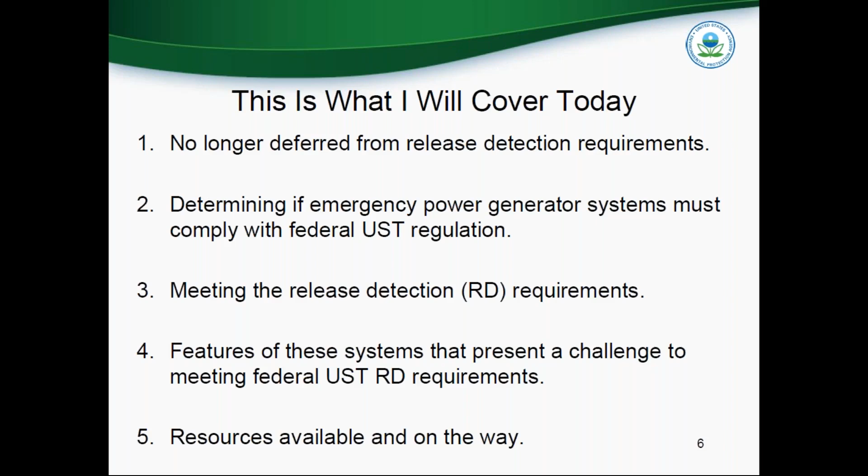But launching into my first topic here, it's the deferral. It's no longer applicable to these UST systems. The original federal UST regulations in 1988, they deferred these systems from the release detection requirement. That deferral was never intended to be permanent. The systems were not excluded or exempted. They were merely deferred to address technical issues at the time. Those technical issues, they centered around, for the most part, the remote locations of these emergency generator tank systems, sometimes associated with communication towers and things like that, even hospitals.

At the time of the proposal, there was that need for EPA to establish different requirements or tweak the requirements for release detection that were applicable to typical systems or traditional systems, more focused for the emergency power generator systems.

But lo and behold, in November of 2011, based on information that we received and getting the regulatory process underway, we discovered that about 30% or so of the emergency power generator systems were already regulated across the nation. That was due in large part to a number of states not deferring these systems.

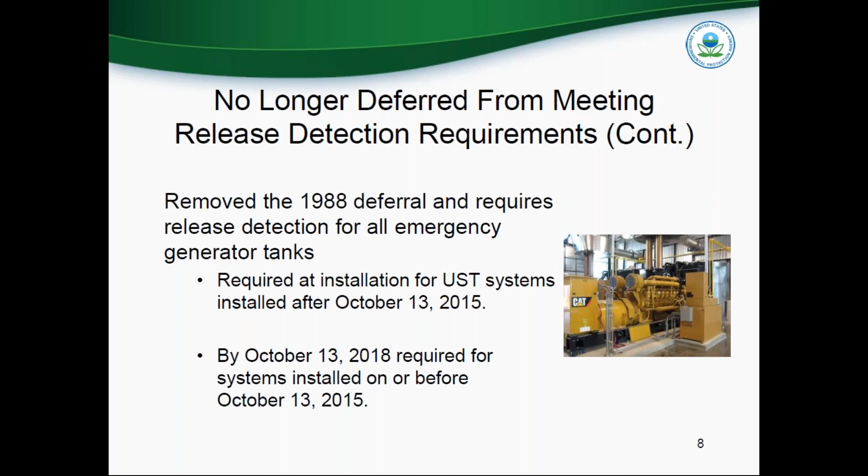So the older systems that were installed prior to that October 13, 2015 date, EPA provided a 3-year time frame for owners and operators to retool their systems to meet the release detection requirement. So as of October 13, 2018, the older systems had to meet the release detection requirement.

So let's take that 30,000-foot view of determining whether a power generator system is regulated or not. I'm going to give two main considerations, and we can dissect it from there. First consideration is, does the power generator system, and I'm not calling it an UST at this time because we don't know if it's an UST. If you do, you have to do the calculation. You have to look at the definition of an UST, and it's provided by statute and in the regulations. I'm going to read it real quick so that we're clear.

The underground storage tank, or UST, means any one or combination of tanks, including underground pipes connected thereto, that is used to contain an accumulation of regulated substances, and the volume of which, including the volume of underground pipes connected thereto, is 10% or more beneath the surface of the ground.

Now, looking at that, one very important phrase to pay attention to is that one or combination of tanks. That phrase right there, and this word in particular, tanks, the definition does not single out underground tanks, does not exclude above ground tanks. This definition includes above ground or underground, below grade or above grade. I'll try to refer to them in that context, above grade or below grade.

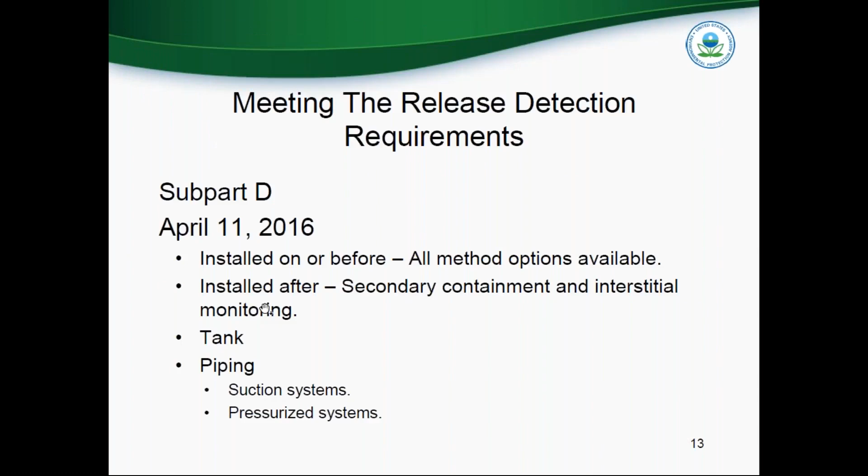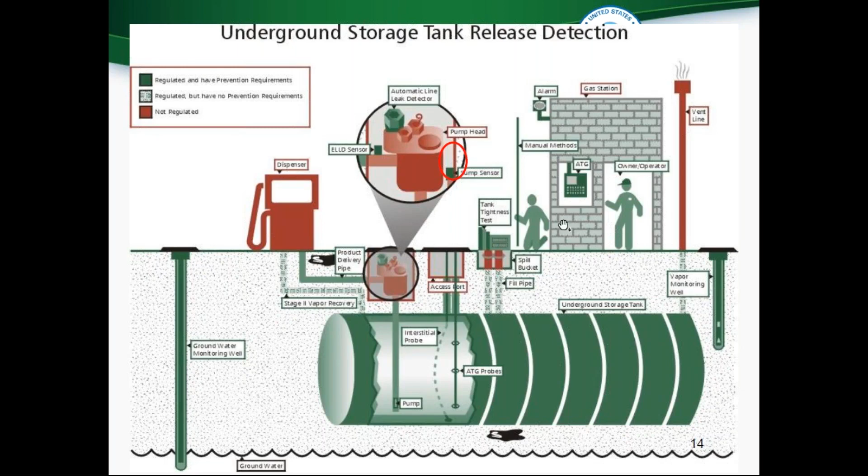So looking at the requirements here in a graphic form, this graphic has been presented in a number of EPA publications. It just shows in situ where these release detection methods are used in the system. This list that I provided here is just a shotgun approach to the tank options and piping options. The monthly requirements for tanks are applicable.

Again, interstitial monitoring after that April 11, 2016 date is the only method that can be used. Owners and operators may back up their systems or use duplicative release detection or backup systems, but primary is interstitial monitoring for the release detection requirement.

You also have the piping requirements here. For your suction piping, a number of these systems are still suction systems, but with those larger capacities, they switched over for the most part to pressurized piping systems. But if it meets the safe suction system, a European suction system, no release detection is required.

There has to be that proof, of course, of verification that it meets the European or safe suction setup, but no release detection is required. Otherwise, the 3-year line tightness test or a 30-day piping monitoring release detection method is required. We're familiar with the line leak detector requirements for pressurized piping. There's that dual requirement. They have to be met.

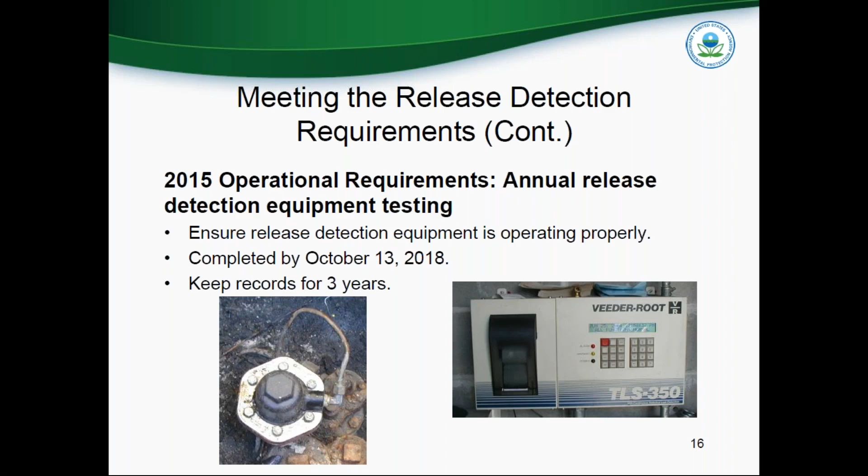So I want to move on to my fourth area that I want to cover today. I want to talk about a 30,000-foot view of the components of emergency power generator UST systems that present a challenge for meeting release detection requirements. There are 3 in total that I want to focus on. There may be more, but these, I believe, are the most problematic or urgent to address.

Not only are these components part of these systems, and not part of traditional UST systems like at C-stores, but there are some regulatory requirements and codes of practice that apply that present the UST program, or owners and operators, with some challenges to meet not only the UST requirements, but the requirements in those codes of practice. The generator itself, that's not something you see typically at a C-store. The day tank, an above ground tank, typically is not something you see at a C-store.

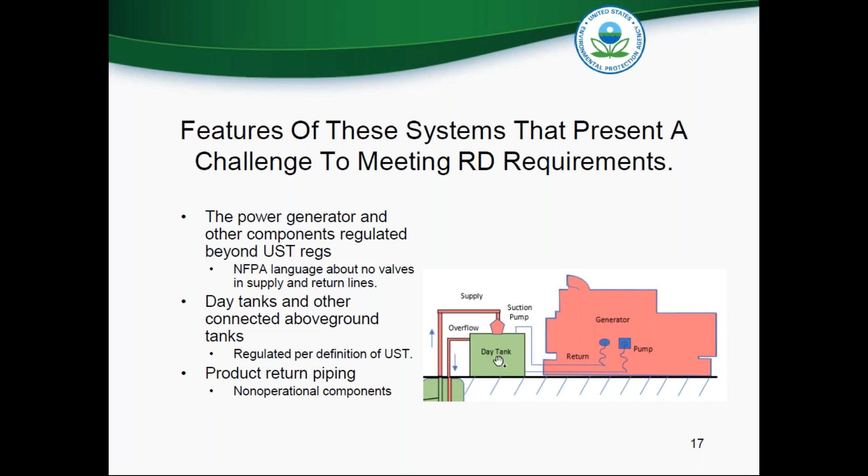day tank. In order to meet that requirement here, EPA, we were asked to look at the gravity feed lines, and the issue of gravity feed lines addressed, for all intents and purposes, the NFPA 37 restriction, if you will. I'm going to use two diagrams to talk through this. If you look at this configuration of piping here, this is the return line coming back from the day tank. It is pressure assisted. This product comes to this point, and for all intents and purposes, it flows back by gravity from this point back to the main tank.

As long as there's no obstruction to prevent that flow back into the main tank, EPA views this line right here, this section that's regulated. Again, the above ground lines are not regulated. This below grade line is regulated. So from this point basically back, that's in the federal program. That's our requirement or our jurisdiction. There's no blockage back to that. EPA views this as a non-operational component. This is again akin to a fill line. It's basically a refill line from the day tank back to the main tank, if you will.

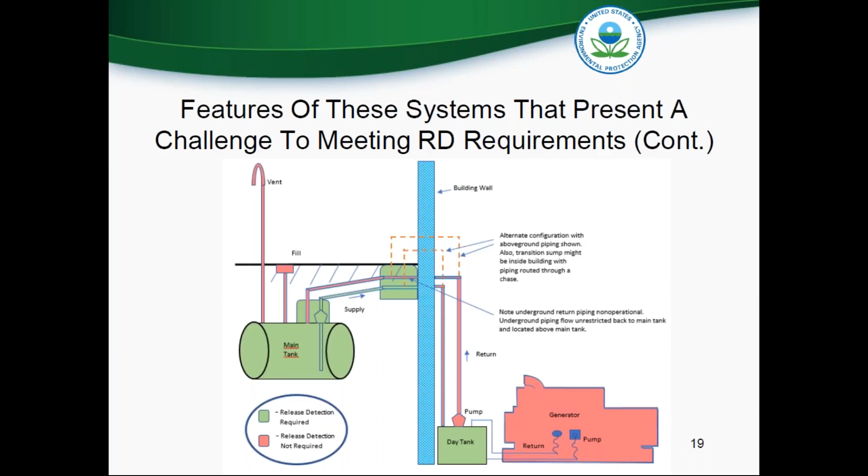Hey, can you give me control back, Nick? I want to bring up that diagram I had real quick. Sorry about that. Or maybe I still have control? Maybe I can go to it quickly. Yes, go back, keep going. Sorry about this, guys. Further. Keep going. Further, please. There you go. Stop. Okay, go back.

All right. Looking at the diagram on screen, this above ground piping, whether it's 10 feet or 10,000 feet, none of this piping is regulated under the federal UST requirements. The volume in this piping is not included in that 10% determination. Very good question. There are some situations where this piping runs up to the 10th floor, for example. It is behind concrete. That's still not underground.

That piping run, whether it's 10,000 feet up to the 100th floor, going to the day tank on the roof with the generator, does not factor into the consideration of whether this is a UST system or not. And that piping does not have to meet the requirements of federal UST 40 CFR. 40 CFR does not apply.

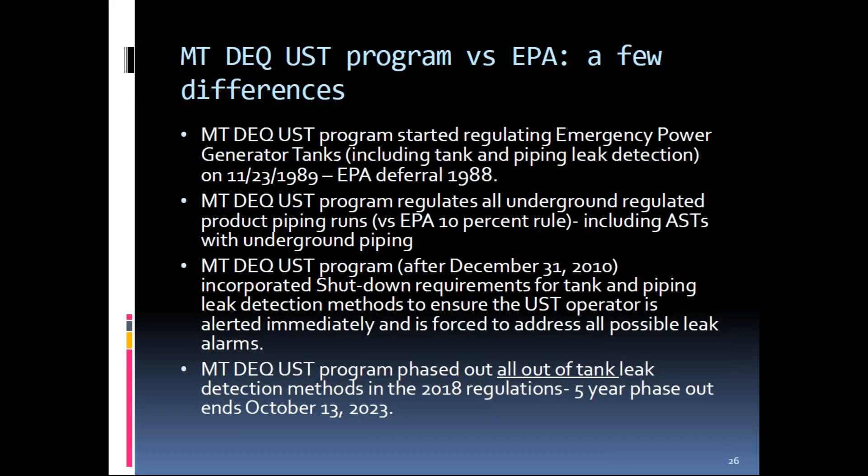And also, as far as the tank, if you have a double wall tank with an annular interstitial liquid sensor, discriminating or non-discriminating, you would have to program the ELD to shut down the dispensing system. And Montana also decided recently to phase out all out-of-tank leak detection methods. We added this with the federal 2015 regulations, which ours are 2018. And we did a 5-year phase out ending October 2023. So groundwater and vapor monitoring will no longer be a valid method of tank and piping leak detection.

Some more differences. In Montana, we also issue UST construction permits. So anytime one of our licensed individuals wants to modify a system, install a system, or remove a system, a permit is required, so we can put all the requirements that we have on the permit. Even though we regulate above ground tanks with associated underground piping, we don't currently have an SPCC program like the federal program. So that's something that we currently don't implement and regulate.

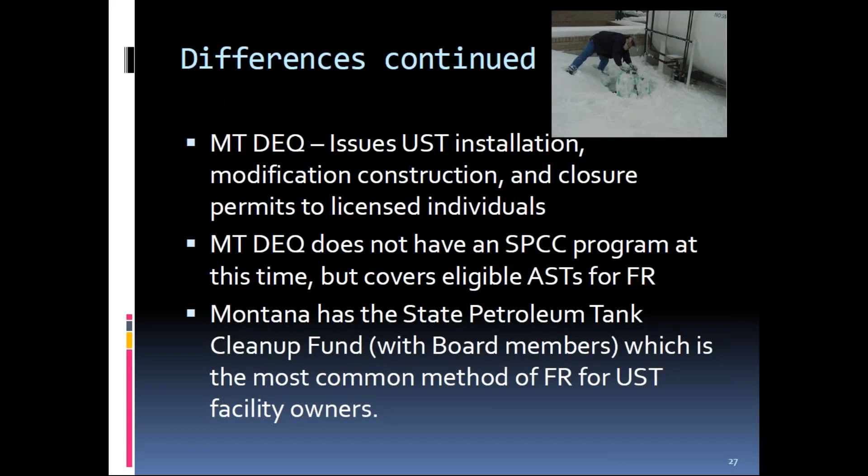But ASTs are eligible for the state financial responsibility fund. Montana has a state petroleum tank release cleanup fund with board members, which is the most common method of financial responsibility for UST facility owners. Another thing we added to the regulations in 2011 is an anti-siphon requirement, specifically to address some of these unique systems with above ground tanks, underground piping, EPGs. I believe this came from the fire code, and we decided to add it into our regulations as well.

The owner or operator of a system that is located at an elevation that produces a gravity head on an underground piping system shall ensure that the product pipe is equipped with one of the following devices: a department approved anti-siphon valve, a department approved normally closed solenoid valve, or another department approved device designed to prevent siphoning. So this is from PEI, and it shows a mechanical anti-siphon device on the left with a suction pump or suction dispenser.

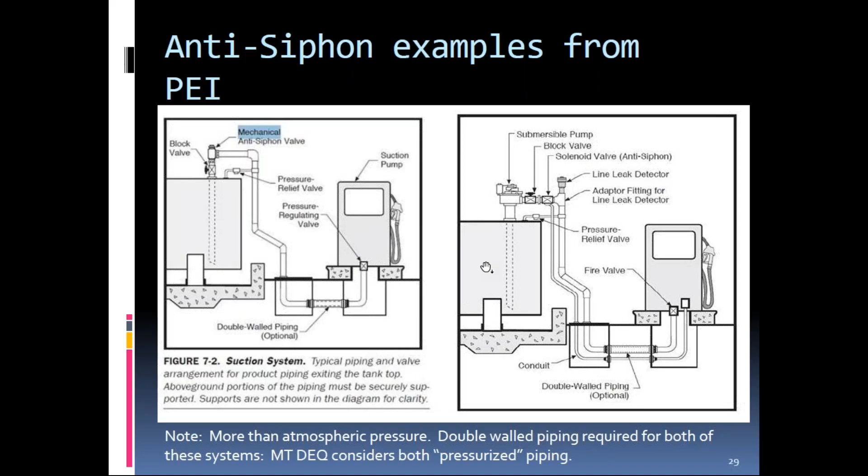So that's the general order on the right with an STP showing the solenoid valve before your ALLD, and that could be a mechanical line leak detector or electronic line leak detector installed there. It shows like an adapter fitting or what we call like a T housing. We'll get into more detail of that later, but basically I just wanted to show you some unique piping situations that we addressed, and these kind of situations would apply also to emergency power generator systems.

So we were a little late to the party on the farm tank exemption. The EPA and the federal regulations were effective, I believe, in 1988, where Montana, we did our exemption in May of 1995. So we exempt underground farm and residential non-commercial motor fuel and heating oil storage tanks of 1,100 gallons or less, which were installed before April 27th, 1995.

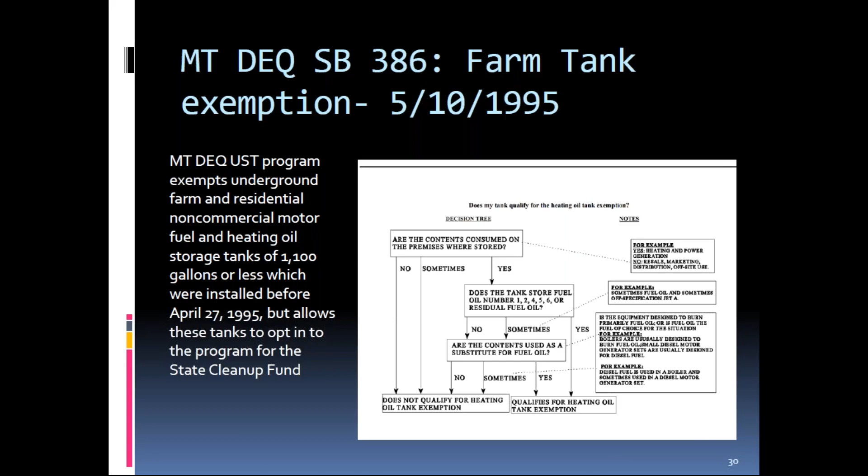But we also gave the owner-operator the option to opt in the program, and then they would be eligible for the State Petroleum Release Cleanup Fund as far as the state financial responsibility mechanism. I included a schematic of what we've used in the past for a decision tree to determine if they're eligible for this exemption. Obviously, the main question: are the contents consumed on the premises where stored? And Tim also noted that.

So for an inspector in a state, all of a sudden you have to meet the new requirements with emergency power generator systems and owners and operators as well. So we're going through this period of change, and change is tough for most folks out there, and it seems like specifically even harder for owners and operators. Once they get into a plan and a system, it's hard to change.

And that kind of relates to The Last Dance, watching on Netflix there with Michael Jordan, Scottie Pippen, Dennis Rodman, all kinds of different personalities. And at some point, Michael Jordan was scoring a lot of points, but not necessarily winning all the championships. So when Phil Jackson came in, he changed things up, and he wanted to take the ball out of Michael Jordan's hands a little bit and move the ball around more. And that way, they called it the triangle, have a lot more options for folks to play off the ball and things like that.

And it's kind of like what we're going through with emergency power generator systems. A lot of personalities out there in the owner-operator world, and so we have to kind of be team players, work together in these times of crisis. And the nice thing about times of crisis is that lots of innovation occurs, and so we'll get through it.

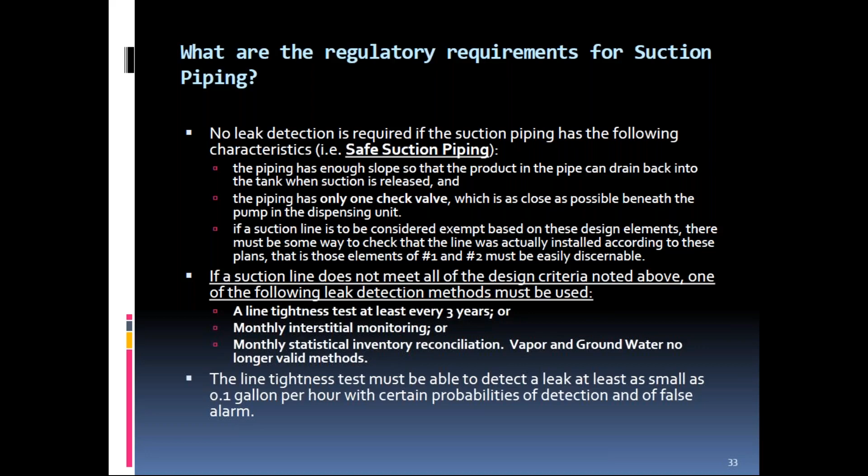In Montana, we no longer allow vapor or groundwater. We're phasing those out. And of course, each pressurized piping run must have one leak detection method from the set. So if all of a sudden you're into a pressurized or more than atmospheric pressure, then you need an automatic line leak detector, and that can be a flow restrictor like an MLD, an automatic flow shutoff like an ELLD,

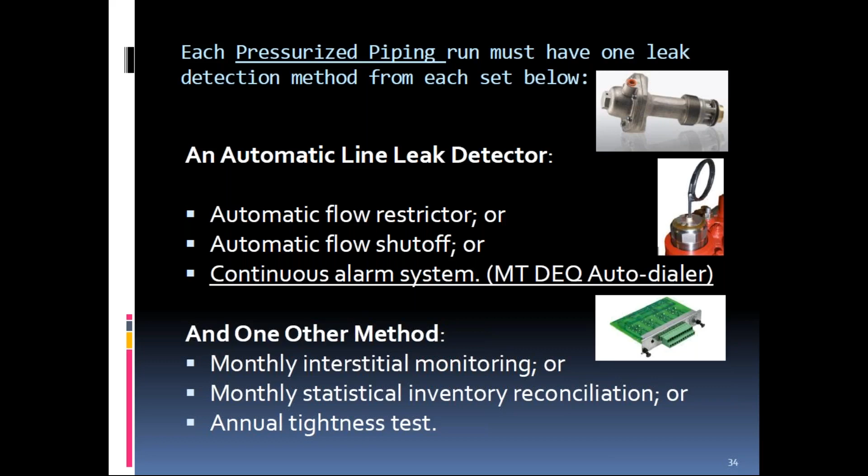and you could also refer to like a liquid sensor with required programming to shut down as possibly that as well. And then a continuous alarm system, which we call in Montana like a Montana auto dialer as it applies to emergency power generator systems. And then you need a monthly piping leak detection method, of course.

So for pressurized piping, I wanted to point out that the ALLD must be designed to detect a leak at least as small as 3 gallons per hour at a line pressure of 10 pounds per square inch within 1 hour by shutting off the product flow, restricting the product flow, or triggering an audible or visual alarm.

And that's kind of what we call an auto dialer, because we decided instead of requiring the emergency power generator systems to shut down, that we would require them to be notified immediately and address those issues. Other facilities that wouldn't be like a heating oil or EPG system do have to have the shutdown. That's kind of how we do that.

And so how that works with an auto dialer is a continuous alarm system which constantly monitors line conditions and immediately triggers an audible or visual alarm if a leak is suspected, like your liquid sensor goes into alarm and detects product in the containment sump. Automated interstitial line monitoring system can be set to operate continuously and sound an alarm, flash a signal at the console, and even ring a telephone in a manager's office when a leak is suspected.

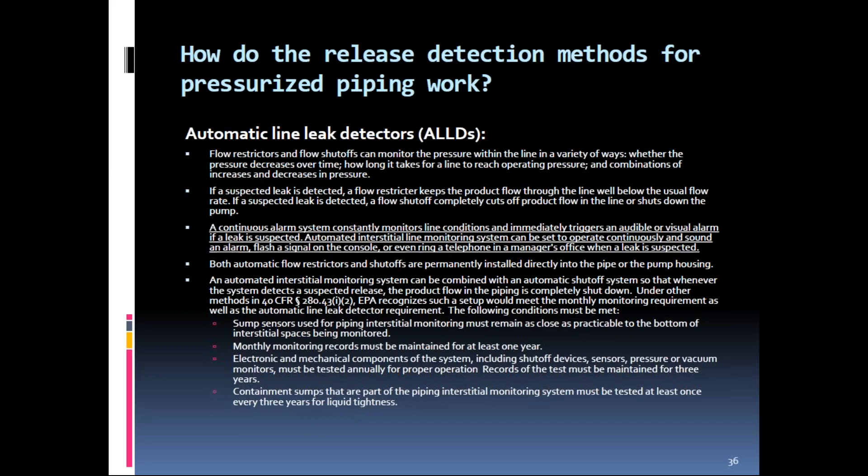Typically, we do the telephone, like an auto dialer, some brand names possibly like a Sensaphone, but they work with an existing leak detection panel like a Veeder-Root or Franklin Fueling System tank monitor as well. We do see some places like detention centers that prefer, instead of a telephone, they have a green or red light that flashes at a 24-hour manned station where there's always an individual there watching that system.

So full disclosure on these 5 versions of US suction systems we're looking at, these did come from South Carolina. So thank you to South Carolina for sharing these. They were really well done. And we can kind of show the differences in the 2 states. Montana has some slight differences, and we can go over that.

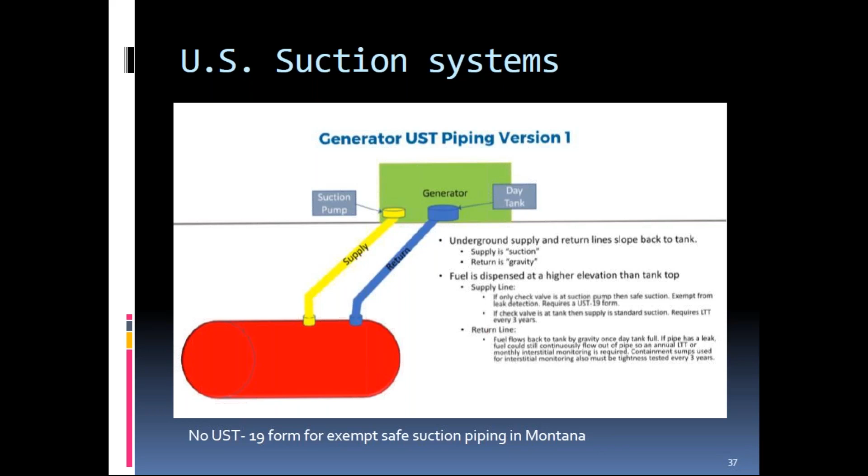In Montana, the only difference is on the return line, we require at least a line tightness test on a 0.1 gallon per hour basis once every 3 years, so not annually. And I believe that this would be a non-operational component on the return line for EPA, and that there would be no leak detection required. So Montana, we kind of fall in between EPA and South Carolina.

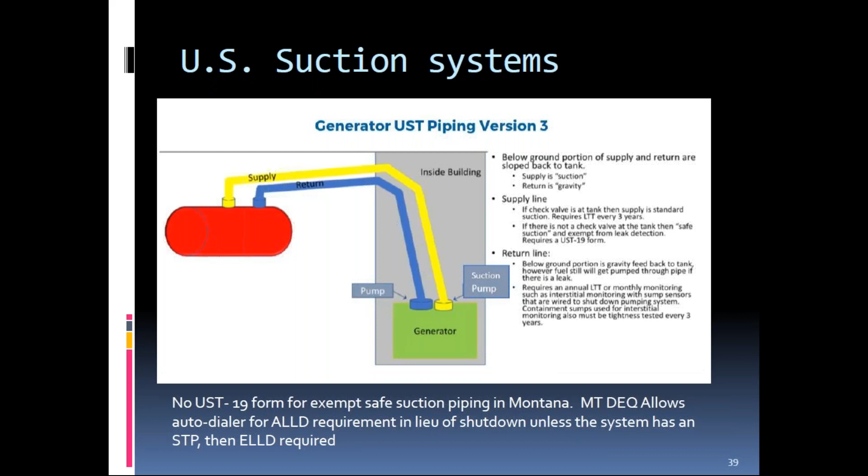Hey Seth, this is Drew. Sorry to interrupt real quick. I want to make sure we have plenty of time for John. So if you can bring it home in the next 2 or 3 minutes, that'd be great. Thanks. Go ahead. Okay, sounds good.

Version 4, we got a supply line with looks like a submersible turbine pump, and then return day tank with or without a pump and returning to the tank. Supply is pressurized, return is gravity. And so supply line piping is pressurized, requires the ALLD and an annual line tightness test or monthly interstitial monitoring.

And then the return line, fuel flows back to the tank by gravity once the day tank is full. If pipe has a leak, fuel could still continuously flow out of the pipe. So South Carolina requires an annual line tightness test or monthly interstitial monitoring method. Without the pump, on the return, we would require that 0.1 every 3 years. With the pump, we would require at least a 0.1 annual line tightness test or continuous interstitial monitoring method with an auto dialer.

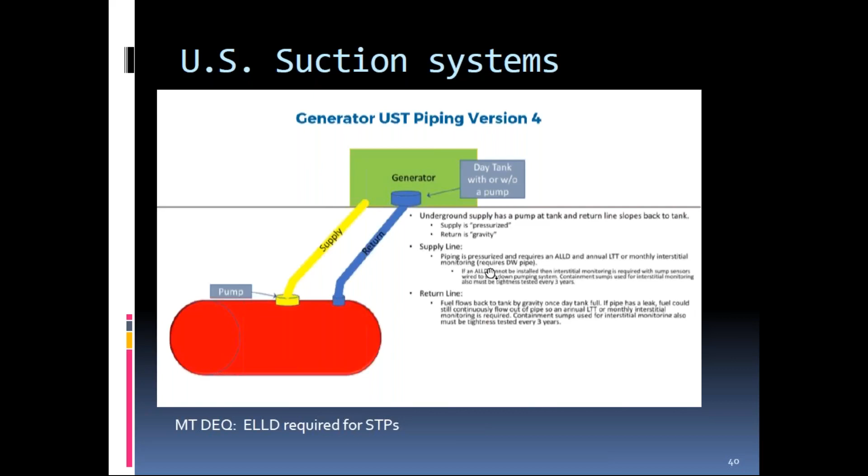So basically, the auto dialer plays a big function in Montana with emergency power generators, and we allow the auto dialers to be installed to existing or newly installed leak detection panels, automatic tank gauge for these kind of systems that are US suction systems that may have pressurized components, but do not have STPs. Auto dialer communication will send all alarms to the concierge station for 24-hour notification response.

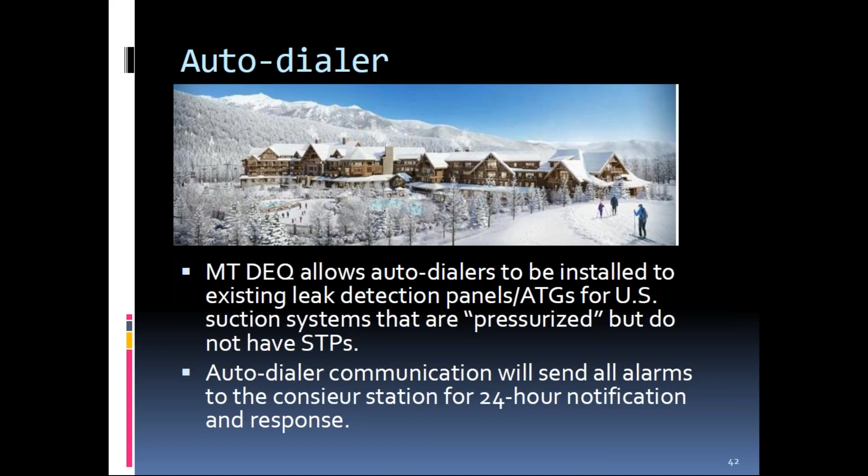This is a newly built Spanish Peaks Lodge that has an emergency power generator system with the concierge manning 24 hours. Just wanted to point out for STPs, we require those ELLDs to be installed, and we can get into more details on that, for pressurized STP systems that are part of emergency power generators.

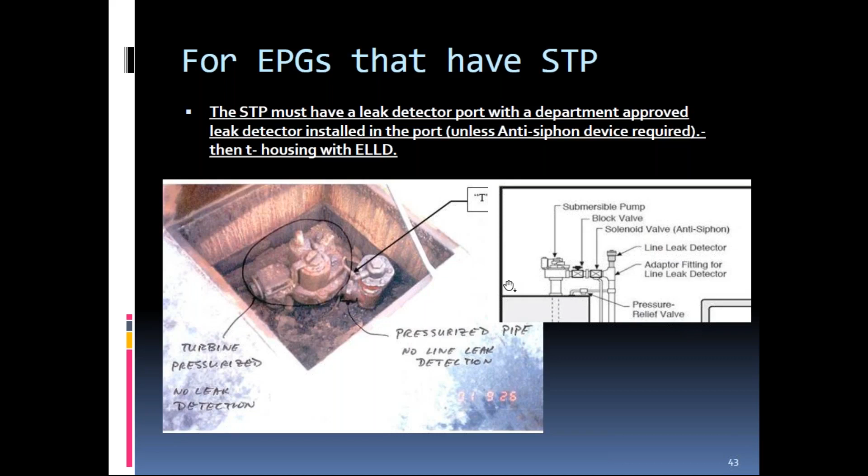So that's basically everything I have for you today. Hopefully it's been a help for other states, territories that are looking at doing tank and piping leak detection requirements and implementing the federal regulations in their state.

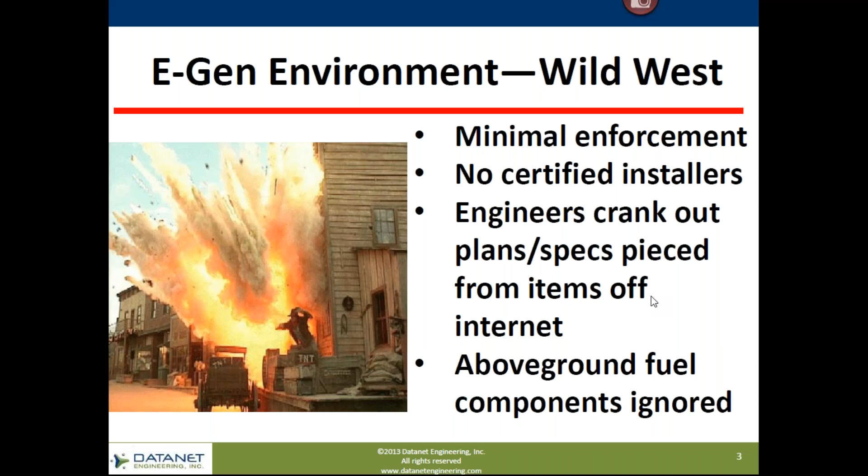It's the little EGen tank and the fuel piping. That's where we're at the Wild West, frequently because it's not enforced. All the codes, all the regulations applying to the above ground piping, above ground day tank. We don't have certified installers in most states. We have engineers and planners who are just cranking out plans and specs, just downloading things off the internet. The next issue is that we've got above ground components that are often ignored by everybody.

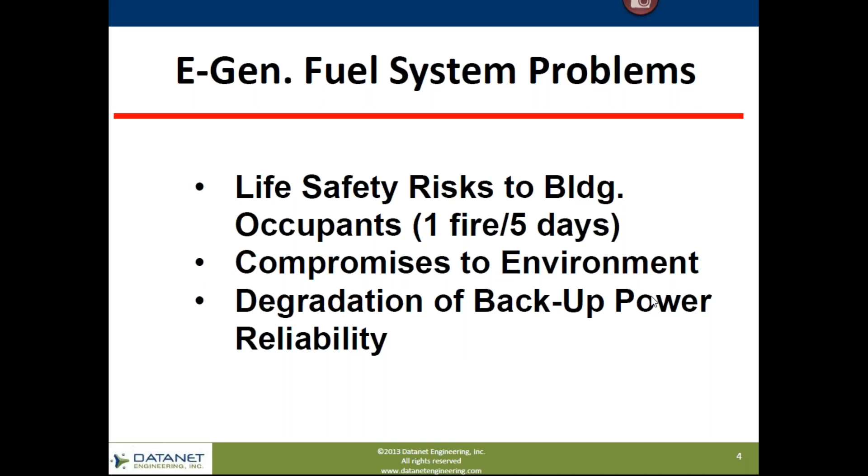Now, I want you to appreciate other problems, unlike a heating system. For example, life safety risks to building occupants. If you're not aware, we have one emergency generator fire every 5 days in the United States over about a 7-8 year period. Compromises to the environment regarding fuel spills, they're definitely pretty lousy. But another critical issue is the degradation of the reliability of backup power. We have that backup generator for a reason.

Mentioned by the previous speakers, years ago they only had a few hour requirement for backup fuel for hospitals. Today, a class 1 medical facility, 96 hours. So we went from 2, 3, or 4 hours to 4 days. And so you understand why we have a massive fuel tank expansion program at hospitals and a variety of other facilities. Here's a quick list of fuel releases in hospitals.

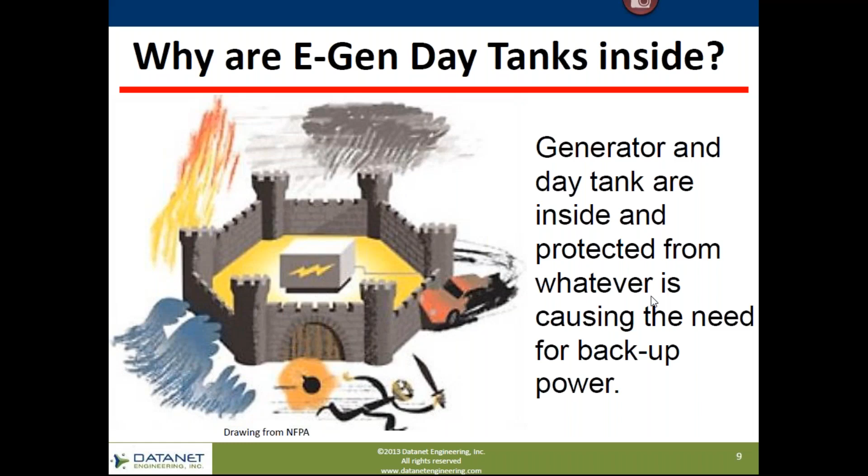Now, these E-Gen tanks, please appreciate the emergency generator tank has to be located inside the building right next to the emergency generator. We can't have a long distance because of the limitations of the fuel pump on the diesel engine. So therefore, we've got to put it inside that building, and that building is being hit by whatever it is, tornado, fire, tsunami, whatever. That's why we have to have that backup power when it gets hit and we lose the grid.

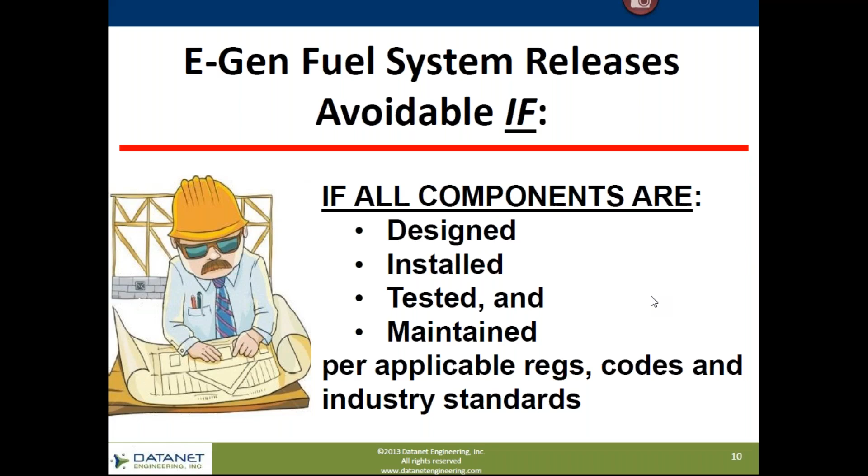Now, emergency generator systems can be extremely reliable if all components are designed, installed, tested, and maintained per applicable regulations, codes, and industry standards. If you have a code and regulatory and industry standard compliant system, you're going to have, first off, a reliable system, and you're also going to have one that you're not going to have to lose sleep over regarding fuel losses.

Now, my biggest problem is the people that are installing them and inspecting them. Engineering firms do not have a clue, but they're just cranking out plans and specs. Reviewers who are reviewing these plans and specs, they don't know what they're looking for. Last time I took a set of plans and specs for an emergency generator at a large school facility to a county review, their comments were the fence around the fuel tank emergency generator area has to be 6 feet tall. That was their only review of all the plans and specs, a 6-foot fence. They didn't even look over the piping, how it was laid out, nothing.

Building inspectors go out there, fire marshals go out there, police. Fire marshals, what are they typically looking for? What they've been trained on, fire extinguishers and emergency lighting. Unfortunately, that's the limitation. Very few fire marshals go through any of my fuel tank classes.

So the next thing is we've got a lot of problems with the piping that extends the fuel from the main tank to the day tank. That's already been addressed by the previous speakers. I just want you to appreciate that those are the weakest links. Those are my fuel pipes where we get the leaks. And now, we've gone over the suction and pressurized system. Please don't forget the overflow and return piping. At some sites I've been, they had no clue where those pipes went. And unfortunately, they were not going back to the tank.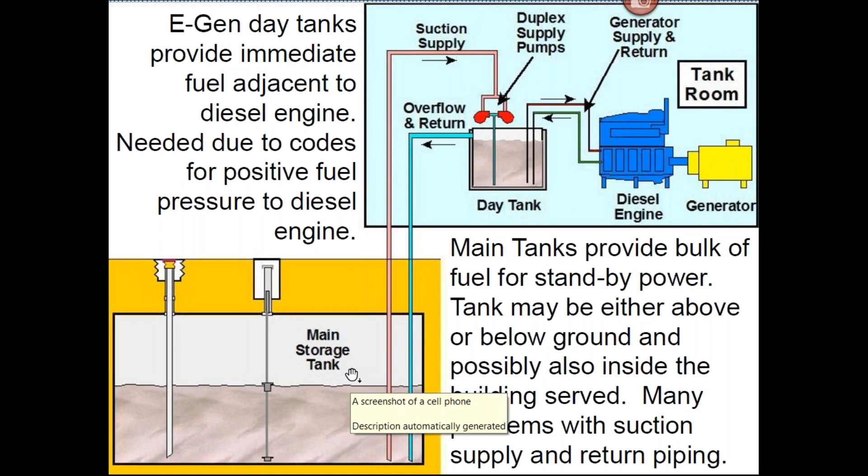Okay, so unfortunately, I sometimes have a contractor arguing that a day tank is not a fuel tank. Funny when all of a sudden a 90-gallon day tank overflows with 10,000 gallons of diesel fuel through a hospital, through an office complex, down from the roof, I'm pretty sure we can call that a fuel tank. Okay, so now we could have that one supplied by suction coming up from our main tank UST. That's one way that it could be possibly connected.

More and more, as a result of reliability issues, we're having a submersible turbine pump. My problem with submersible turbine pumps on the issue of release detection is normally we think about an automatic line leak detector installed on the STP. The problem is that frequently will not work as a result of the height difference of how high we are pushing the fuel. An automatic line leak detector, mechanical, typically can only sense 11 feet of fuel. That varies, but that's a good number, 11 feet.

If you're going up 3, 4, 5 stories, none of the piping above 11 feet, so in other words, my second, third, fourth, fifth floor of the building, none of that piping is being monitored by a normal off-the-shelf line leak detector. So please, just because there's a line leak detector does not mean that you have line leak detection.

Another problem that we're having is the underground storage tank is not equipped with a submersible turbine pump. Rather, it has a gear pump installed in a doghouse on top of it. The fuel then comes under pressure out of that pump that is above grade, and then potentially goes underground or it goes inside the building and is hidden. That is still a pressurized supply line. Unfortunately, we have a lot of sites where people are going, well, that doesn't count because it's not a submersible turbine pump, or they say that we can't put a line leak detector on a gear pump or a centrifugal that's above grade.

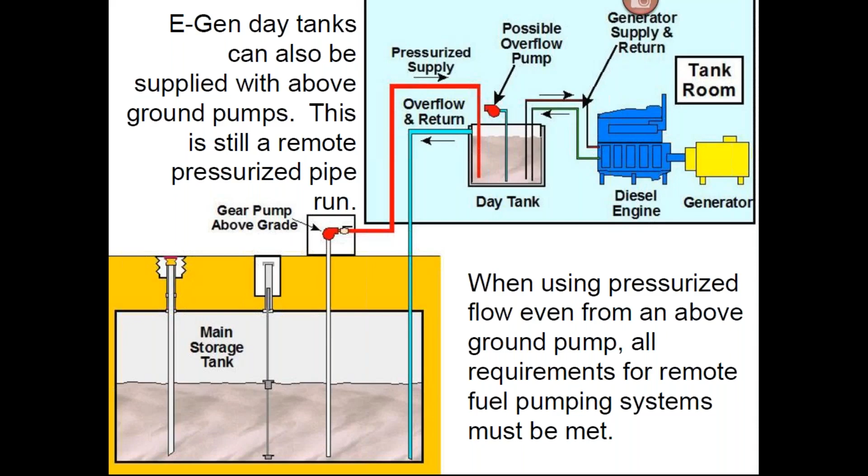That's absolutely false. We can put a line leak detector on any pressurized system, any. Just they're not going to be the typical ones that you see at a convenience store STP that only works with a head of 3 or 4 feet high to push the fuel up to a dispenser.

Now, codes. There are a variety of codes that affect the day tanks, the piping that's above ground coming from the underground tank. NFPA 30 is the granddaddy of them all. That's the one where 90% of the meat and potatoes of details of how things are supposed to be installed, tested, maintained, and over protracted periods of time is in NFPA 30.

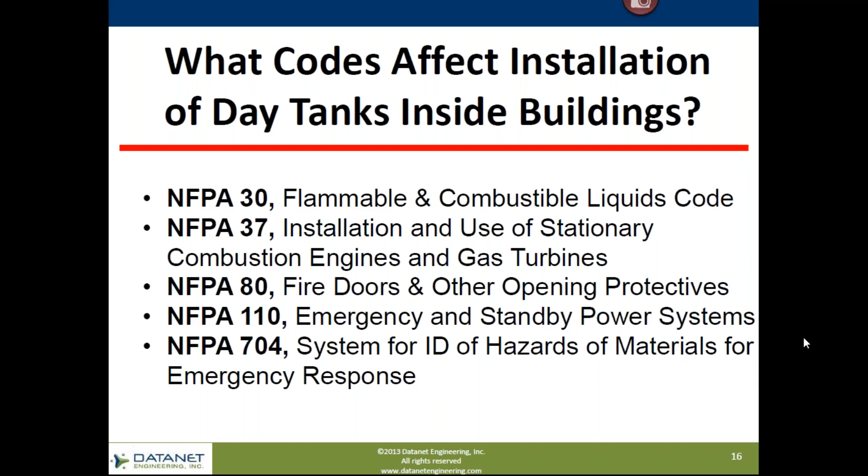37, 80, 110, 704 are also very critical for details of properly installing an above ground day tank, as well as the piping that goes back and forth between the day tank and the underground tank. Now, let's look over a bunch of critical headings on the tank fuel piping, tank room, tank venting, and controls and maintenance. Number 1, tank code issues.

What is an acceptable tank? It's got to be a UL tank. I'm sorry, when all of a sudden I see somebody welded together a blasted little box and they say, well, it's not leaking. No, that's not a tank. Clearance around the tank is quite critical so that we can inspect it, so we can test it. Tightness testing, again, all my requirements for underground and above ground, as well as the lines, come under the tightness testing regulations for the state. And then we get into our inspection requirements.

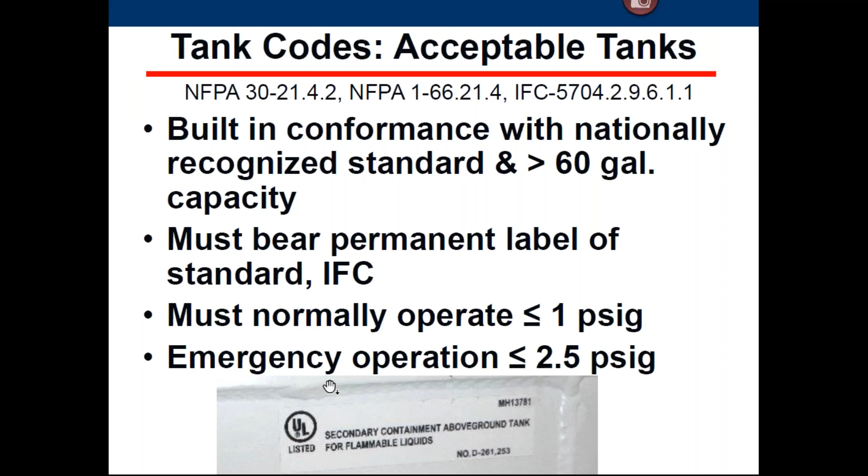Now, tank codes. What's an acceptable tank? Up here in this header, I'm literally listing from the most common codes, NFPA 30, which is our standard code, NFPA 1, Uniform Fire Code, IFC, International Fire Code. What are the requirements that we have to have for a real tank? And number 1 is that if it's above 60 gallons, it's supposed to have a label saying that it's UL listed, Southwest Research listed, something like that. It also has to be an atmospheric tank, typically 1 to 2.5 PSI is my rating on it.

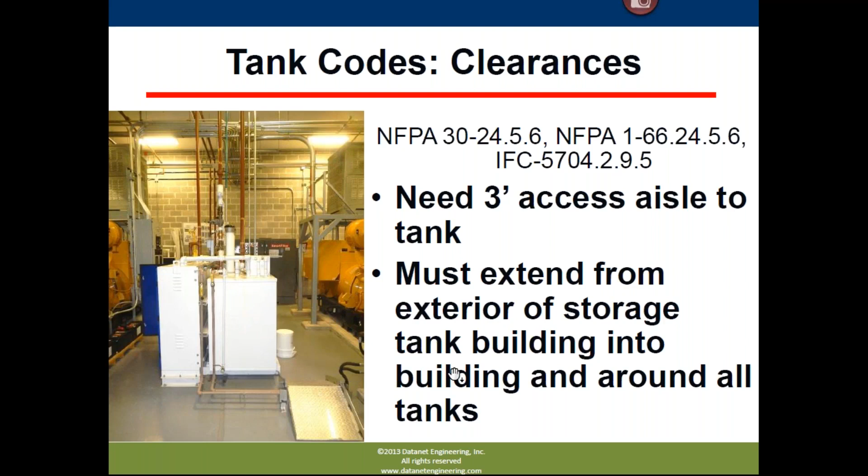Now, clearance. Normally we're looking for 3 feet on all sides, which you're seeing on this particular day tank in the middle of this emergency generator complex. It's got plenty of room all around it. All my piping and everything is all laid out, and how the piping extends back and forth. Hey, that's all cool. But here is a more common one.

Now, piping and tightness testing. Let me go first off regarding tank tightness. Everybody please be aware that my day tank has completely different protocols regarding testing and also the sequencing. We have to test the day tank, it's an above ground tank, when it is finally in position at the building, not at the factory, not out at someone's shop. It has to be after it's installed.

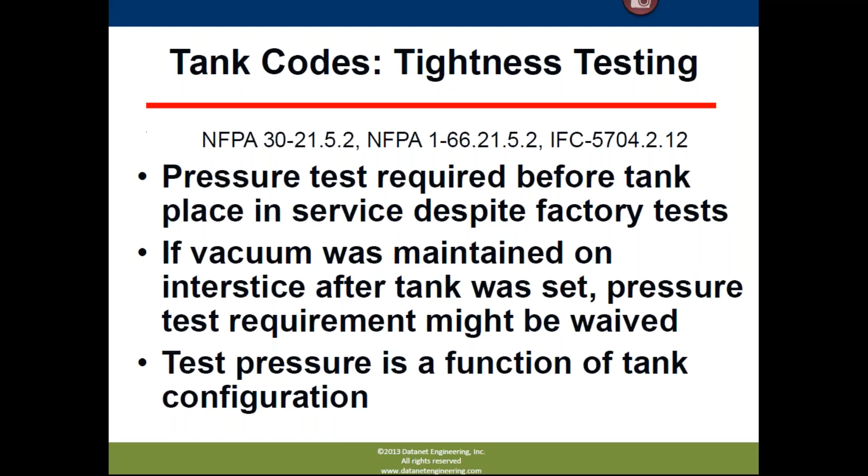Unfortunately, you see he has to literally pull this area here where you see the blank. That is where the float controller is hanging down. We can't test it with those float controllers on there because they don't hold pressure. So as a result, that must be pulled. We must put in a blank, and that's where all the time is, creating a blank that will seal that up, and then we do the pressure test. So please, big difference on these small day tanks and these larger systems as a result of having to create these blanks to seal them up.

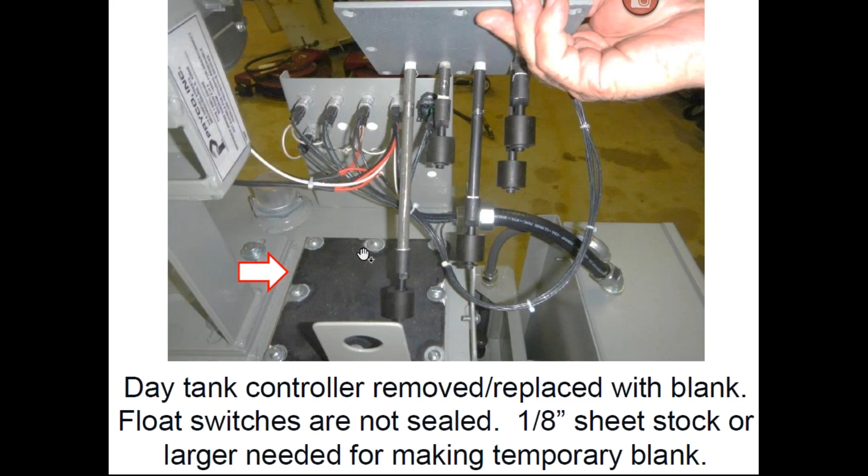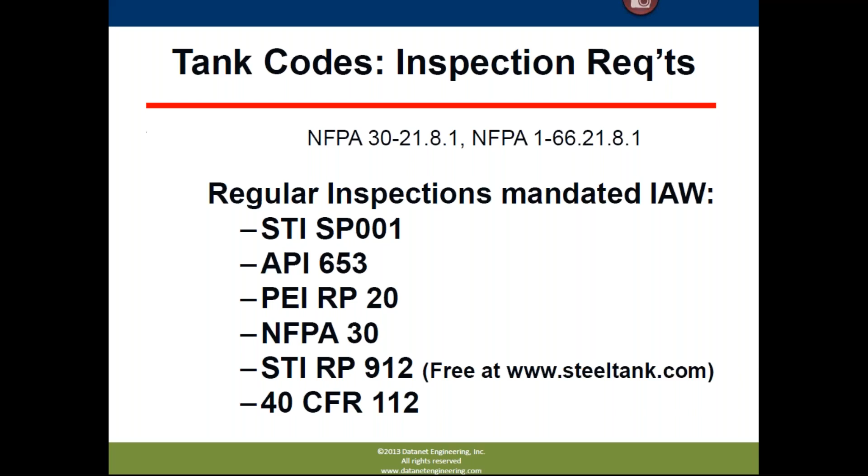Now, the next thing is the tank codes. What are the tank codes for inspection? Here they are, but the most critical one is the STI SP001 inspection standard. That's the one for shop fabricated tanks. That's the one we're going to be using the most.

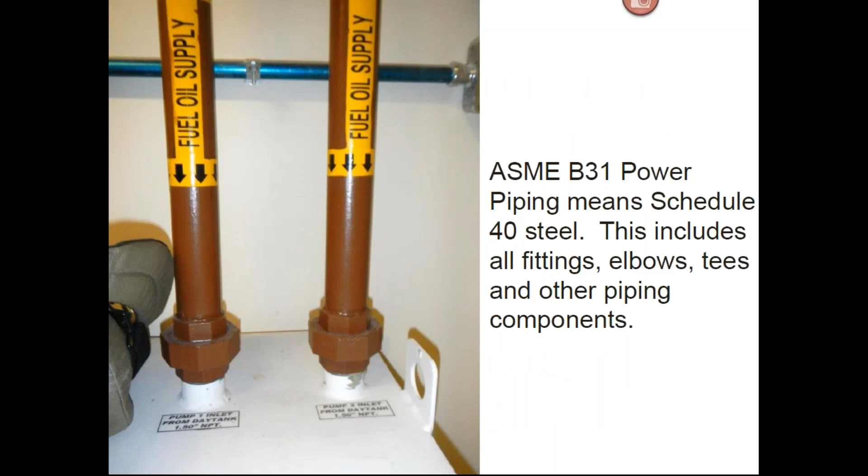Unfortunately, we go over and we see other sites where the connections are absolutely not per code, nor are the materials. Low melting point materials, we're constantly seeing copper tubing, brass and bronze valves used where they are legal for small heating systems above ground, or class 3B liquids; they're not for diesel systems.

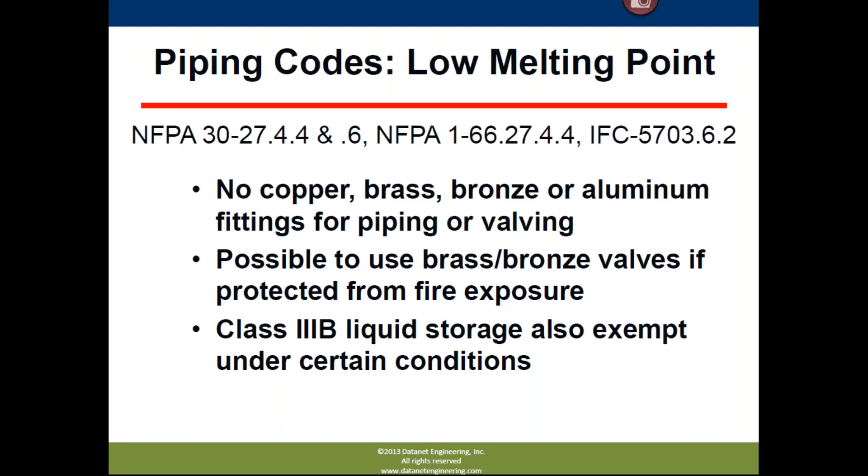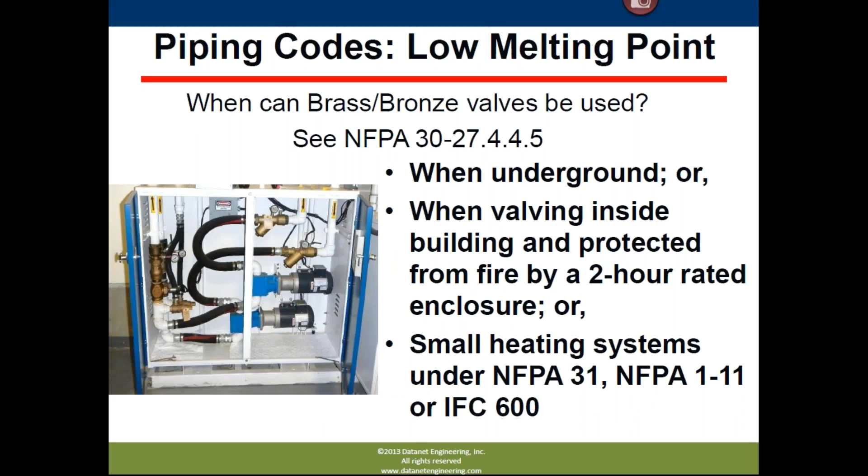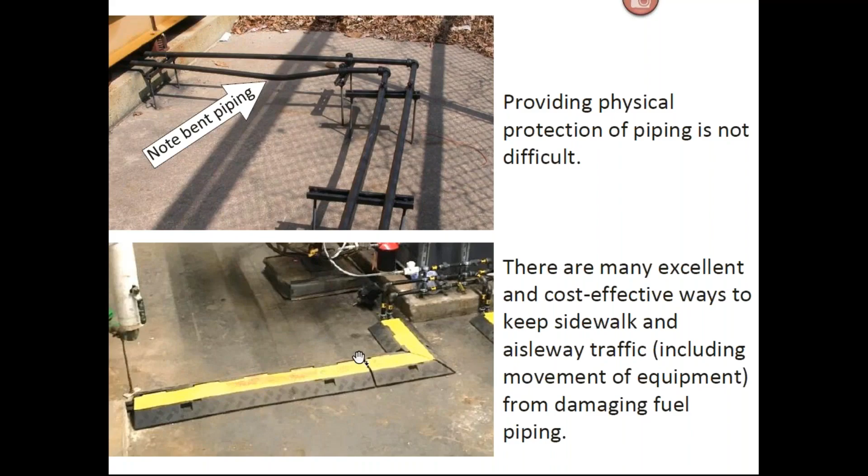Now, in terms of piping, there's a lot of problems. Piping has to be protected from settlement, vibration, contraction, and expansion. Here you see on the top, people are literally stomping on that supply or return line in the middle of the sidewalk, as opposed to on the lower side, where we've got it configured with a cover to eliminate the damage to the piping. We also have the issue of flex connectors, pressure and thermal relief, oil safety valves, bollards, and even the supports. Supports have to be per code. None of that is being done at many sites you're going to go out and see.

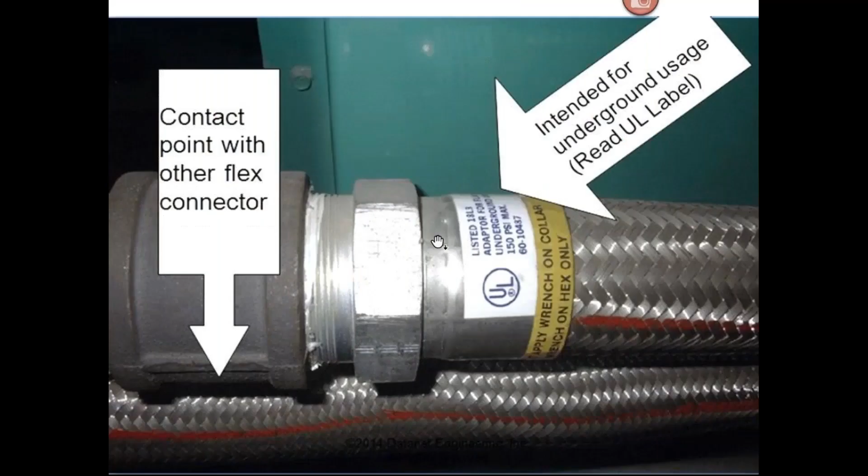Proper supports of piping. And here I'm showing you MSS SP69 rated pipe supports. These pipe supports do not cause damage to the pipe from crevice corrosion or from faying attack. That's the way they're supposed to be installed per code.

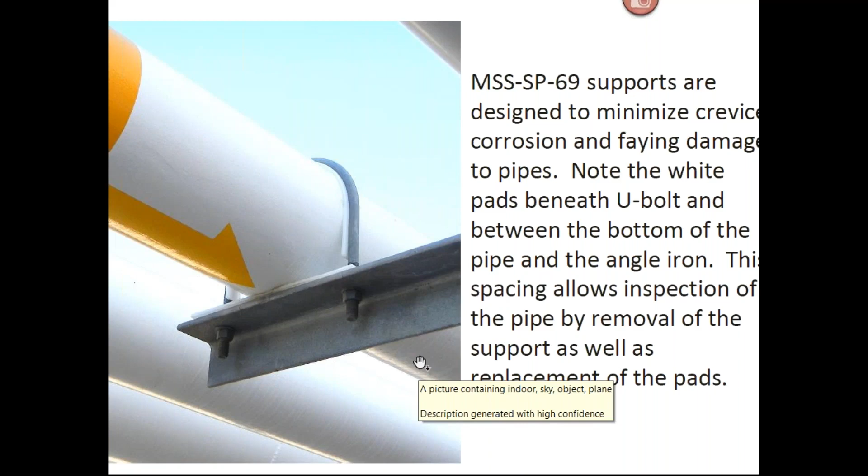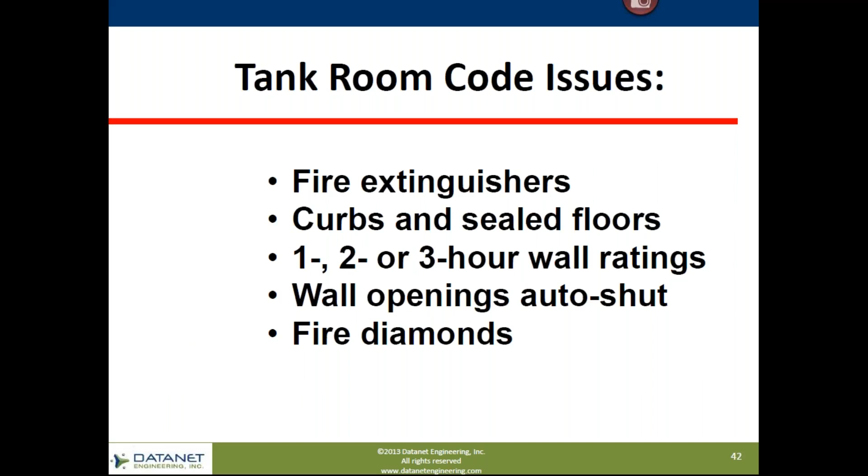Okay, we have tank room issues. We've got a tank inside of a room, the day tank. What about fire extinguishers, curbs, and sealed floors, the fire ratings, the wall openings, and also the fire diamonds? Here you get the issue of what type of fire extinguisher you're supposed to have. Here we have how the floor is supposed to be laid out, including the curbing.

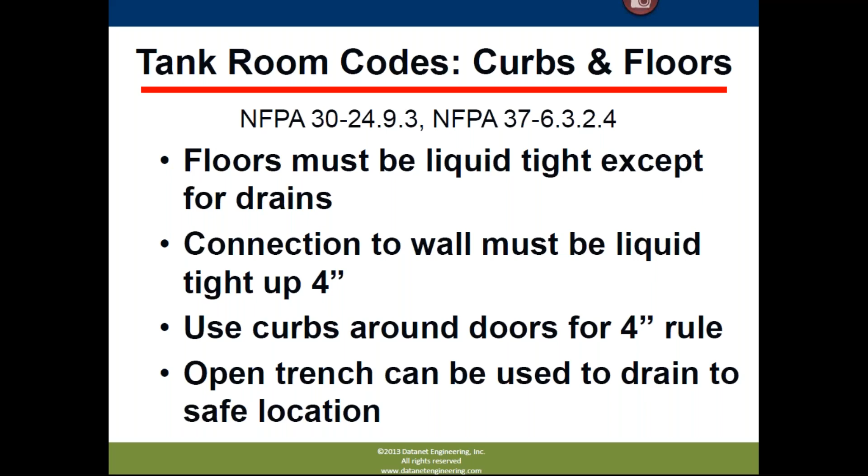Other issues is the fire rating of the room itself, not having any combustible materials inside there, and any opening on the walls of a tank room. You have a day tank inside of a room, that is a tank room. Come on, basic things here is that a tank room contains a fuel tank. So therefore, we must protect the rest of the building from that fuel tank, including a fire.

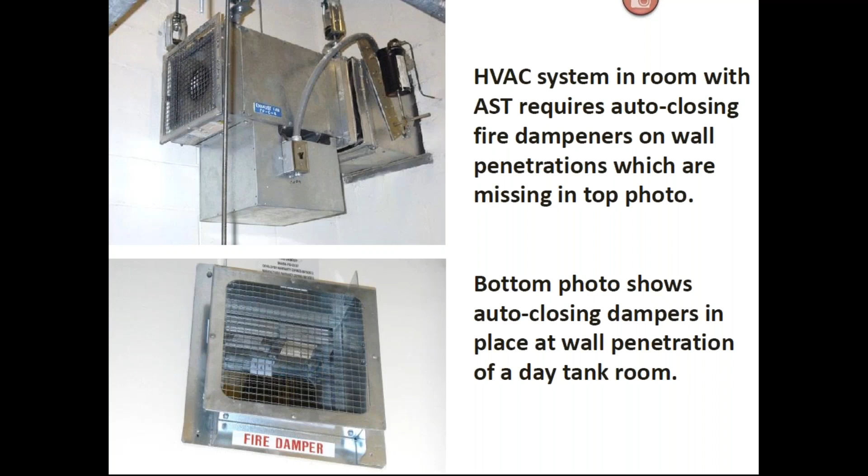On the lower one, we have the fire damper. The upper one, we don't. So the upper one is clearly what we don't want to be seeing, and unfortunately, we normally do in a tank room.

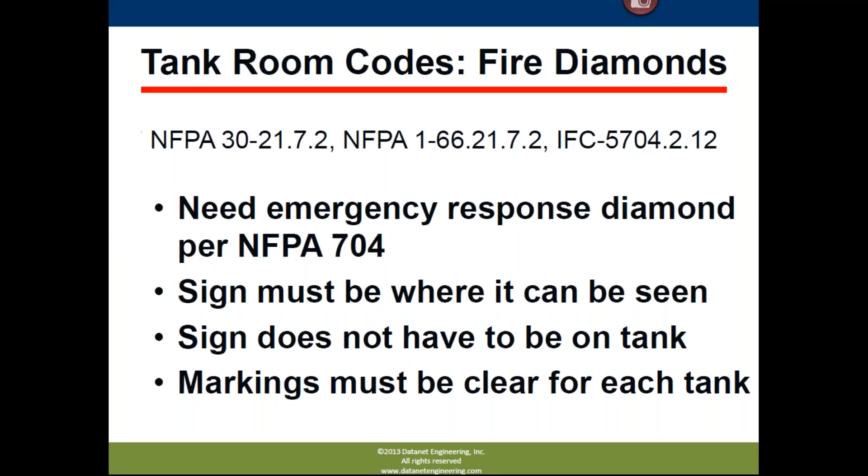The tank room fire diamonds, please. The fire diamonds are quite critical. They're on the checklist of most inspectors when they go out there. The sign does not have to be on a tank. Everybody's familiar with the blue health, red flammability, yellow reactivity. The size of the fire diamond is a function of how far away the first responder will actually see it.

Here you see two fire trucks coming up to an emergency generator building in the back of an office building. Where are they going to be seeing it? It's when they turn the corner. When they turn the corner, they're going to be 100 yards away from the building. The fire diamonds are on the outside of the building, not the inside of the building. They need to approach that building knowing that we have 80 gallons of diesel fuel inside that day tank.

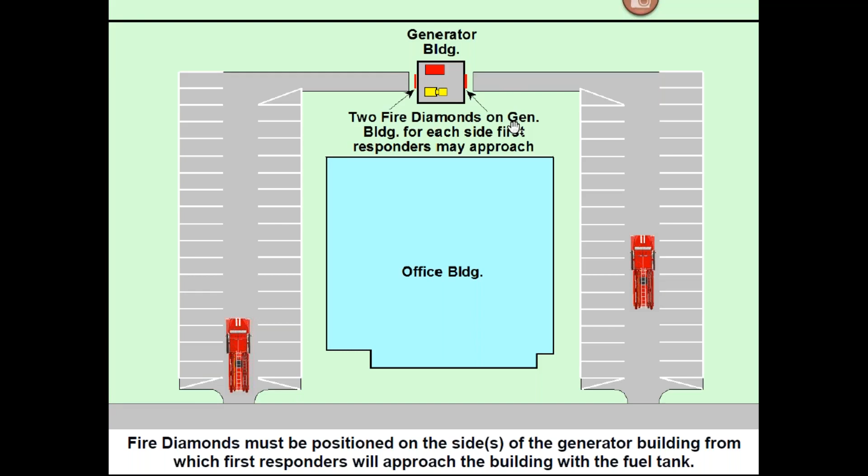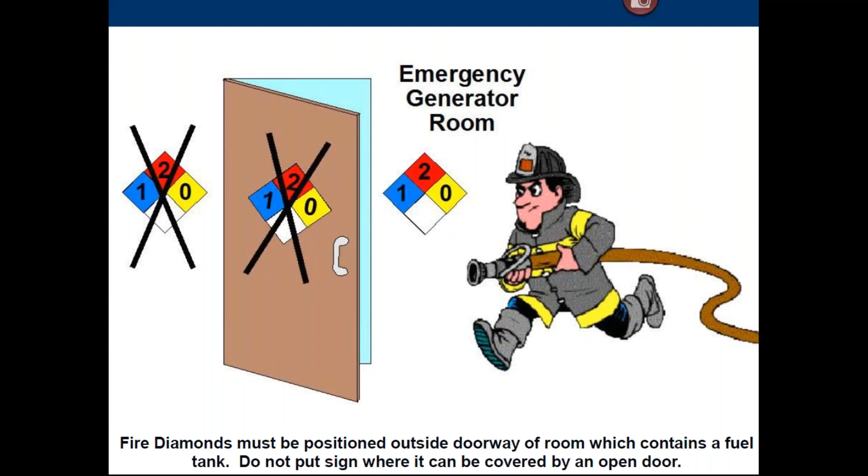Here we have just a mechanical room with a day tank in it. Once again, I need that sign up there. In this case, the fire diamond must be next to the door, not on the door, not behind the door.

Okay, fuel control issues. The biggest fuel control issues are overfill. Please, 2/3 of my releases regarding above ground tanks relate to spill and overfill. Overfill is number one, manual stop, remote alarms, tanks filled by pump, valving release control, and also maximum tank sizing.

That fuel fill is coming in. That little float got gummed up and unfortunately got stuck. And at that point, 10,000 gallons of number 2 diesel fuel came out of the emergency vent and the normal vent on top of the roof of this building. Here is how that tank was configured. So you see the float switch, and we've got the remote pumps bringing fuel into this tank, but there is no overfill control.

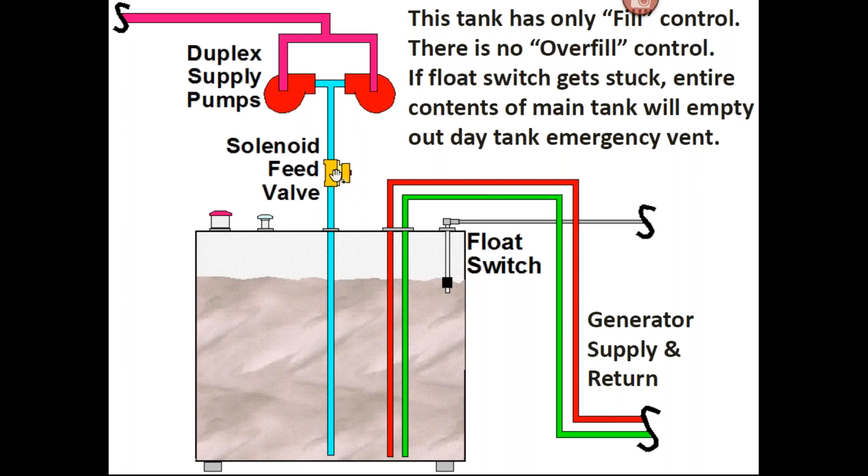That little solenoid that they have there, and again, that's another issue regarding, can I have a solenoid there? Do I not have to have a solenoid? Some cases, yes, sometimes no. The issue here is that solenoid is fill control. It opens up only when that float switch is low. Unfortunately, the float switch gets stuck, the pumps turn on, and that solenoid valve is open. There is only fill control on this site.

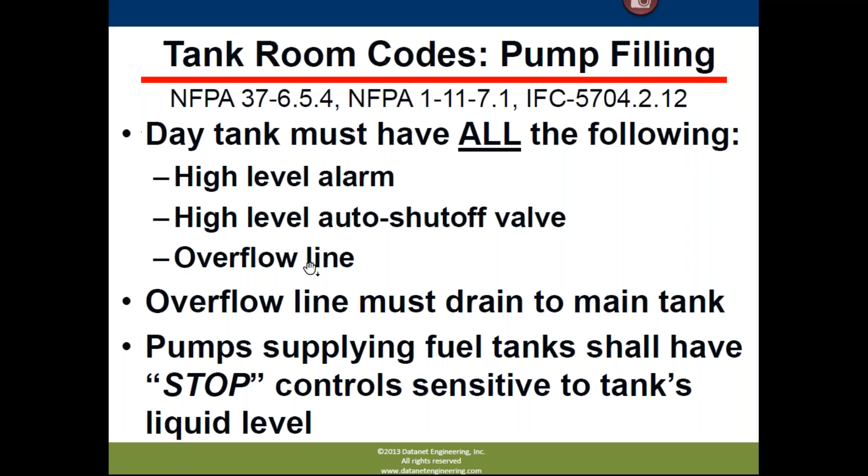The fact is, if I have pumped filling of the day tank, which is what we've been describing in so many of these instances, you must have a high-level alarm, a high-level auto shutoff valve, and an overflow line. All 3 of those are required for that day tank inside of a building.

Okay, the day tank overflow requirements, again, I explained the issue of if gravity is possible, otherwise we use a pump. The actual tank room. What are the issues regarding the tank room as to how it has to be laid out? The fact is that we have to have an emergency stop in the event that my emergency generator is greater than 15 kW.

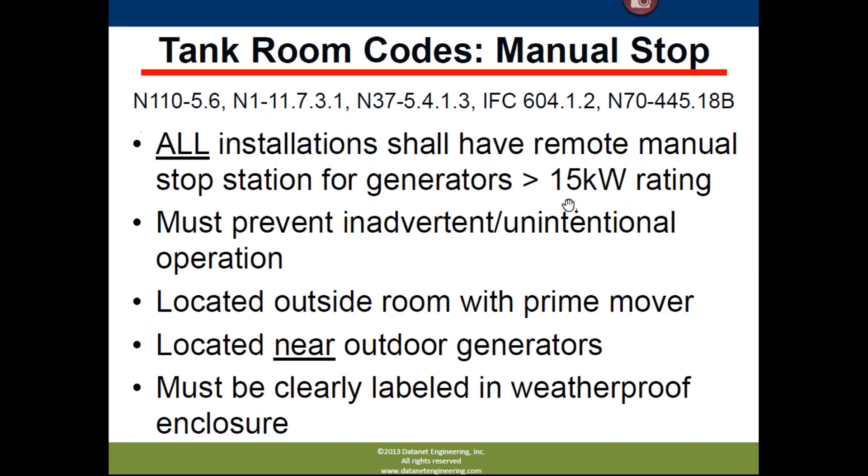The emergency generator at my house is 25 kW. So please, 15 kW is a very tiny emergency generator. Most of my hospitals and office buildings are all measured in megawatts. Here is outside of the emergency generator room of a hospital.

There's generator 1, generator 2. This is shutting down the diesel engine. Please, it's been around. This is not something new. This goes back to the 70s. Here is an emergency generator with a genset tank. The emergency generator shut-off is over here on a wall just around the corner from it.

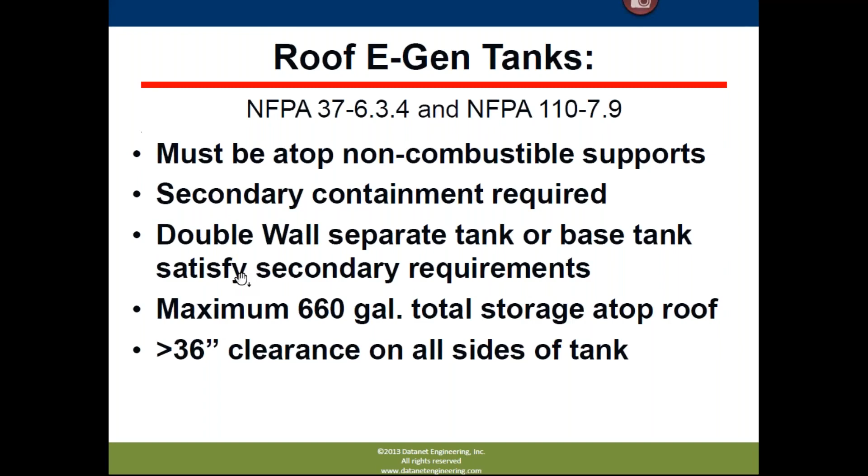My roof emergency generators, all the issues regarding how that has to be installed, how that has to be configured, all the requirements for distances of my setbacks, no combustible materials around them. Then we get into the max sizing. It's a function of how big the tank is as to what the hourly requirements for the fire code are.

Here's an example of 660 gallons, either one or multiple tanks. The fact is that we are usually under the 1 hour requirement. When we get multiple tanks, we're limited to a maximum of 1,320. So a single emergency generator, maximum 660 gallon storage in the tank room with the generator, otherwise 1,320, stop.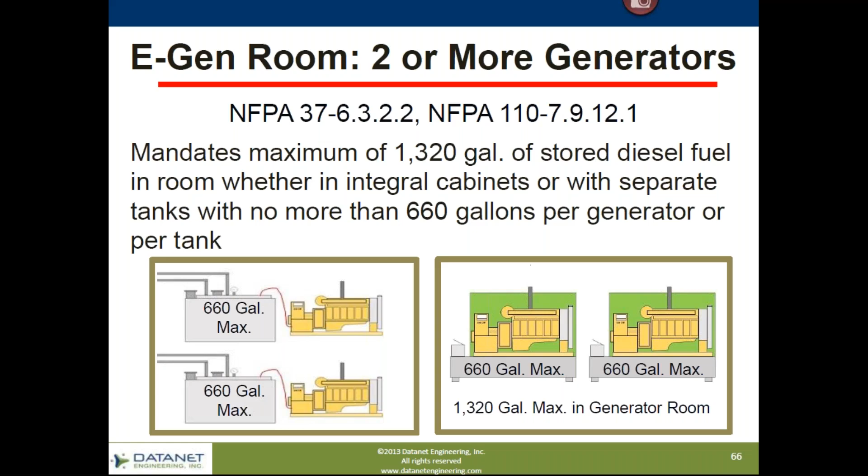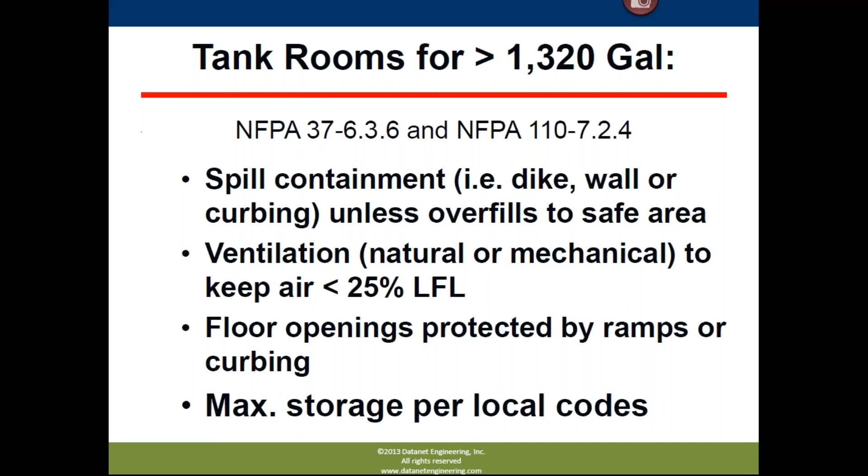Now, again, what are my requirements for a room that's less than 1,320? How about greater than 1,320? How about my spill control? All those issues are just listed down here. Now, we still have to have valves to control pipe break. We've already mentioned the solenoid valves. We also want to talk about fire valves and oil safety valves that are mandated by code.

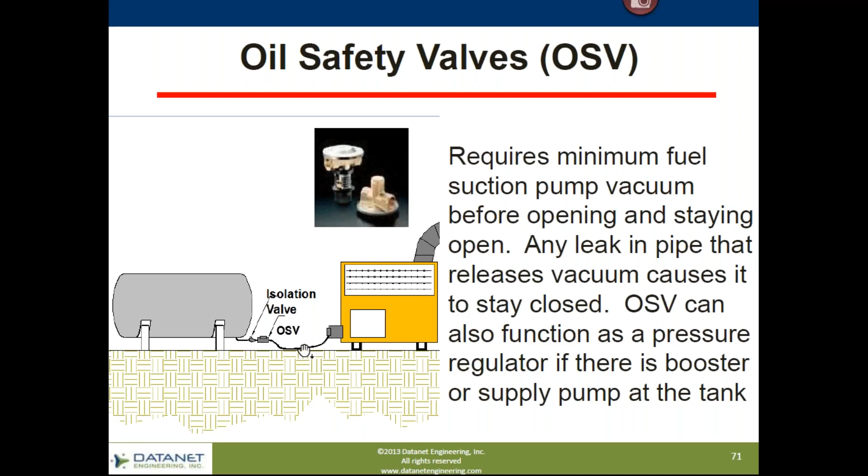An oil safety valve, if you're not familiar with it, is a negative control pressure valve where in the event that the pump does not turn on, that valve will not open. It only opens if downstream pressure is negative. In other words, my pipe is good and the burner of my diesel engine pump is turned on, creating the negative pressure. Otherwise, with any damage to this line, the oil safety valve will never open. That's a requirement.

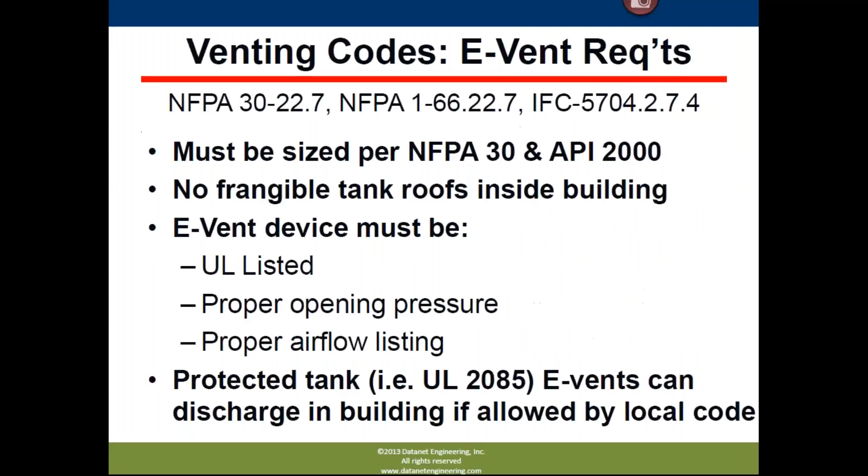Okay, venting always has to discharge outside. I'm not going to go over venting since we just don't have the time, on emergency venting and the size of them. We get into the maintenance issues. On maintenance issues, we have to have the clean fuel requirements. We have to have the fuel aging requirements. My annual testing, fuel does become contaminated. How does it become contaminated? The next issue is how do we keep it clean? I'm sorry, you can look through all this.

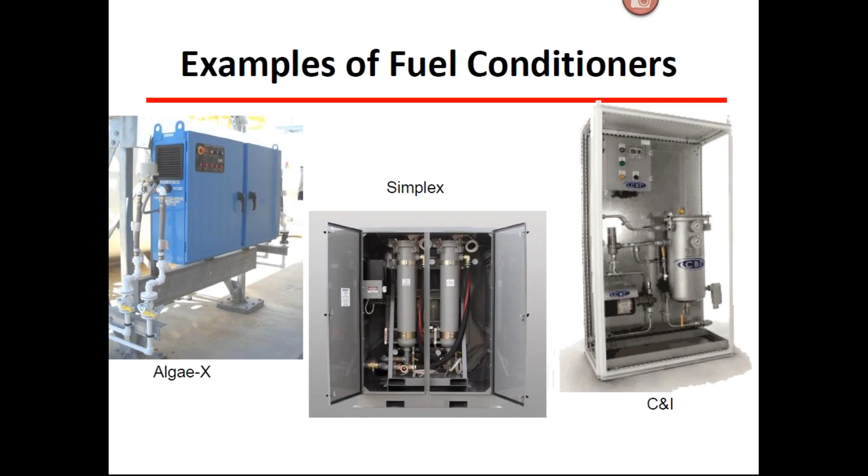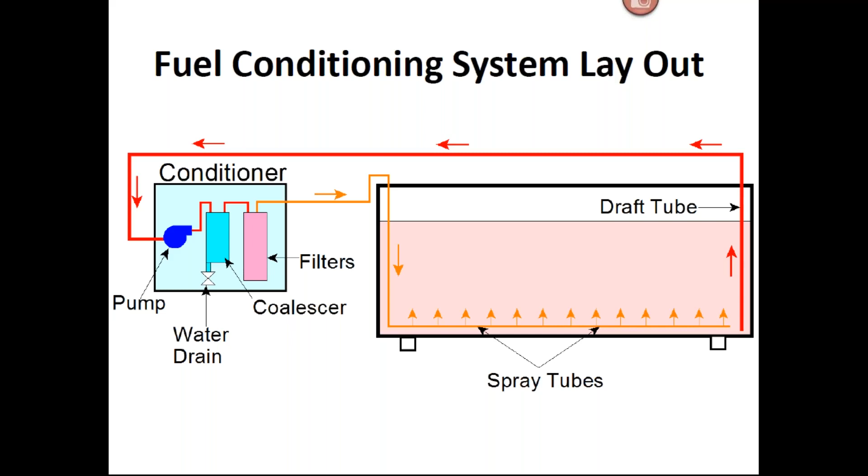What we normally are doing at most emergency generator facilities today is putting in fuel conditioners. Problem: fuel conditioners use a fuel pump to pull fuel from the tank and then send it back. If you have the system laid out incorrectly, you could literally overfill a tank as a result of getting conditioned fuel from another one. Again, my maintenance issues, SP001.

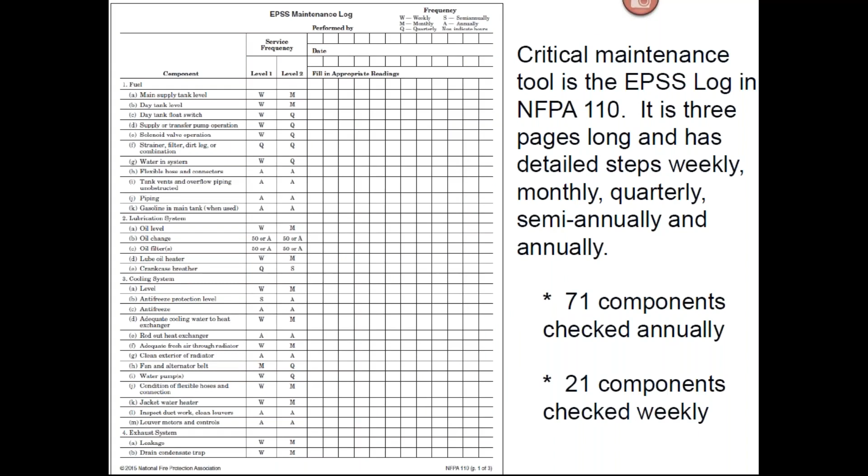The Steel Tank Institute is basically the law of the land that we have as required under 40 CFR 112 as to all aspects of the system being tested, inspected, how we're doing. This is under the fire code, my very comprehensive code requirement for all the things that must be checked on a weekly, monthly, quarterly and annual basis.

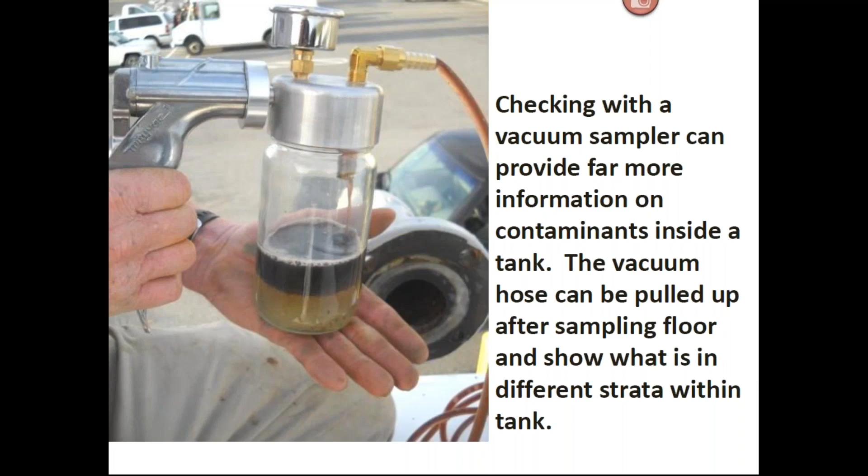This is some of the gunk that came out of an emergency generator main tank. The issue here is the main tank was not having the fuel tested, not having the fuel checked. This is what the emergency generator fuel looked like after a few years. Please, can I recommend for anyone installing tanks or even looking to see how they're supposed to be done, go to Recommended Practice 1400 of the Petroleum Equipment Institute.

Now, last thing is, wrap up. Things are changing. The fact is that the state and federal are coming in, recognizing that we've got to be looking at these day tanks. We've got to be looking at these emergency generator systems. Insurance companies are even requiring code inspections. But please, I want you to take away this from this session: a heating oil tank, an underground heating oil tank, is nothing to compare to an emergency generator.

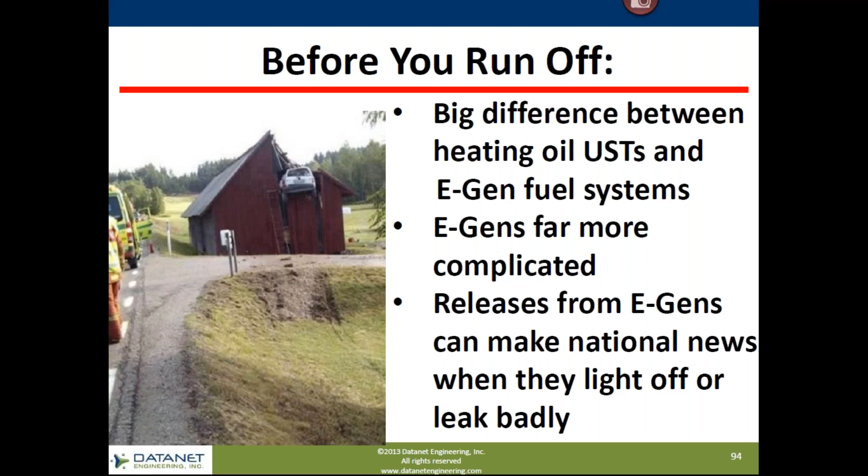Now, further, the releases that we have from our day tank system tied to our emergency generator are usually pretty significant because they're above ground and often inside a building, a very sensitive building like a hospital, like a residence, high-rise apartment complex, things like that.

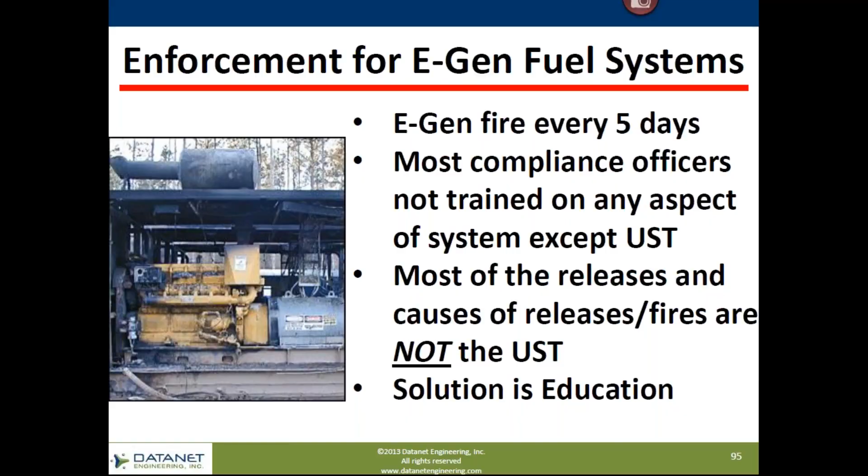The next thing is about enforcement. Things are improving, but my problem is that we need more and better enforcement by trained personnel. You cannot regulate, you cannot inspect what you don't understand. Please, for inspection, any inspector going out there, you've got to have classroom to understand what on earth is going on. It's got to have real world problems. It's got to go over specific pieces of equipment. In this case, this is our training center in Baltimore, where we take you out to mock tanks and we go through every single aspect of how the system should be installed.

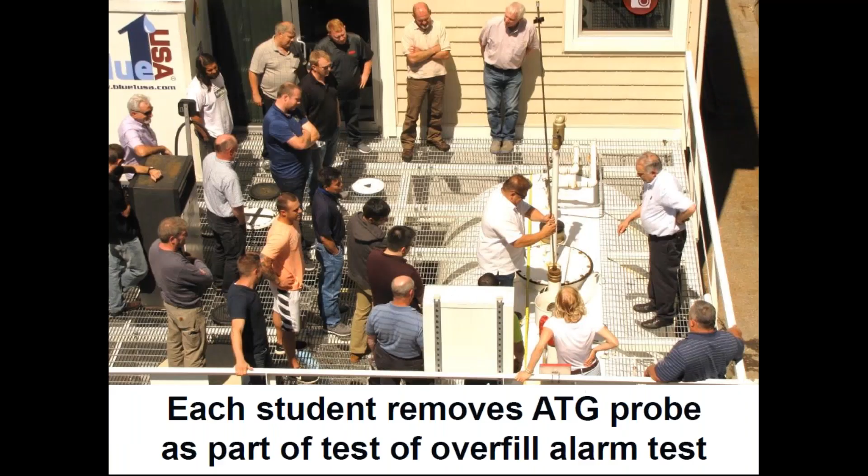One of the items that's a requirement for some of our classes is, this is a gentleman who is a compliance inspector for a Midwest state. He had never tested an above ground storage tank alarm system. Well, all you have to do is just pull the probe and simulate overfilling of the tank by moving the float up and down. Again, go to a class where you can find this out.